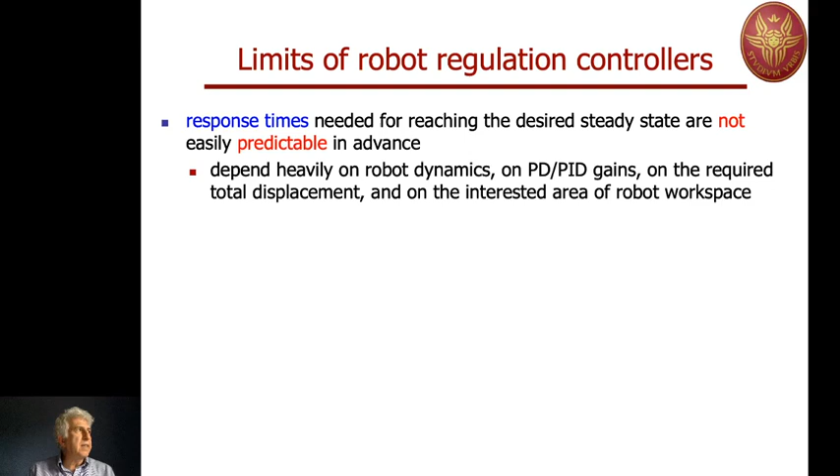This time depends indeed on the particular choice of the PD or PID gains and on the robot dynamics itself, the robot workspace. Remember that if we have sufficient conditions for our gains, the fact that we satisfy them is only a guarantee of asymptotic stability, but not of transient performance, so having a fast response time.

There's another aspect when we are dealing with the integral term, when it's present. This tends to make the final response time longer, because in the integral term we load all the errors of the transients. So even if the robot is starting from the beginning and going in the direction of the desired configuration, so everything is working fine, still we accumulate error.

So when we get closer to the configuration at the destination, maybe the integral term is overloaded with this error and needs to discharge part of the torque, because at the destination the torque needed to balance the gravity may be smaller. We know that at steady state, for sure, the integral term will compensate the gravity in the desired configuration. So if there's too much torque stored in the integral term, there will be a problem.

This is why, even in current automation practice, not for robotics, there are many anti-wind-up schemes that stop the integration when something happens. You can start integrating only in the vicinity of the destination. This could be one idea, actually quite interesting.

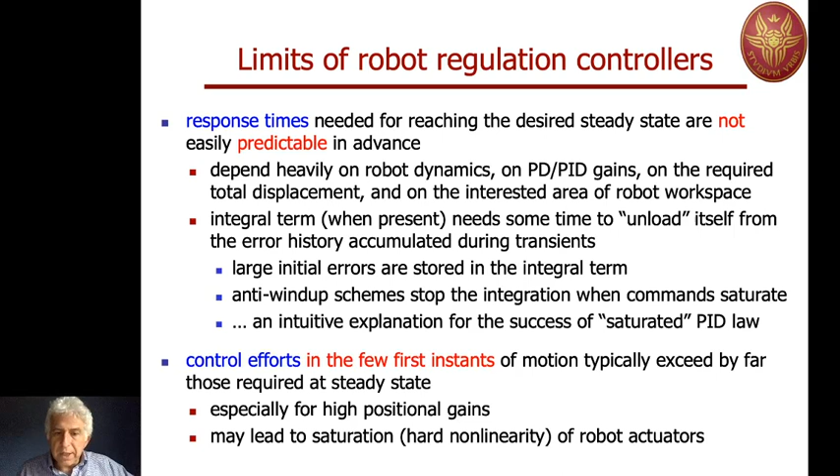So, what happens in the industrial world? Do they have all these problems? In fact, they don't have this problem. They are not interested in theoretical proof, but in practical operation. While the idea that is behind the theoretical proof for us is to really understand the nature of the control problem for robot manipulators, and suggest new ideas.

So this idea is quite simple. So in industrial robots, even if your task is only a regulation task, so you're only interested in being in some configuration and typically at rest, you don't care how you get there, provided that you go there, let's say, fast enough and without requiring too much torque. So exactly the limits of what we have seen so far.

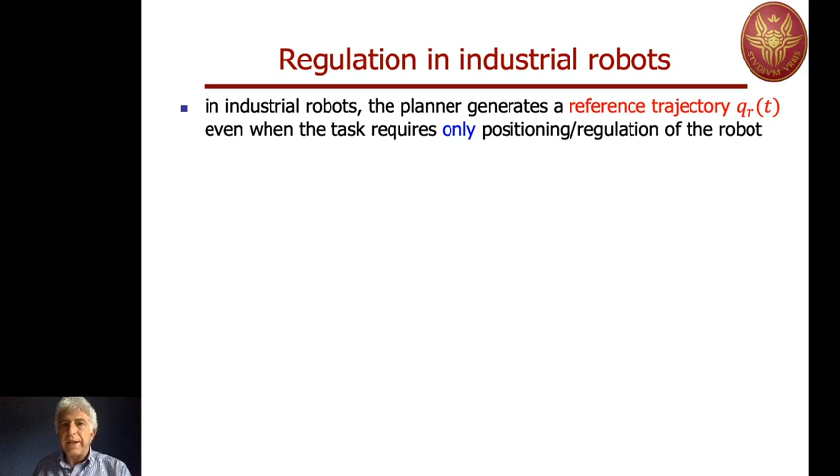So even in the case where QD is a constant reference, the trajectory planner is being called and generates a reference trajectory QR(t), which will bring the robot from the initial configuration to the desired constant configuration. Okay? So even if this trajectory has no practical information content, so we have not to follow a path with the tool in the end effector space, it's just a means to get to the final position.

Why is this useful? First of all, the reference trajectory can be chosen smooth enough. We have seen polynomial type functions, cubic or quintic polynomials, or even other things. But if we plan a trajectory between one configuration and the other, we can also define a transfer time. So how much we expect to spend in that motion. Let's call this capital T.

So this reference trajectory will have a boundary condition, certainly that at time zero, the initial start of the trajectory, the reference is equal to the current configuration. So I'm starting with zero error with respect to this trajectory. And this trajectory will get at time T to the desired configuration QD, and from there on will stay there forever. So it's just an interpolating motion that I'm fitting to the particular point-to-point task.

The form of this is practically irrelevant. Of course, I will use something that will let the robot not wander around its workspace. So I'm using polynomial type trajectories, and I'm imposing also boundary conditions for velocity and maybe also for acceleration set to 0 and so on.

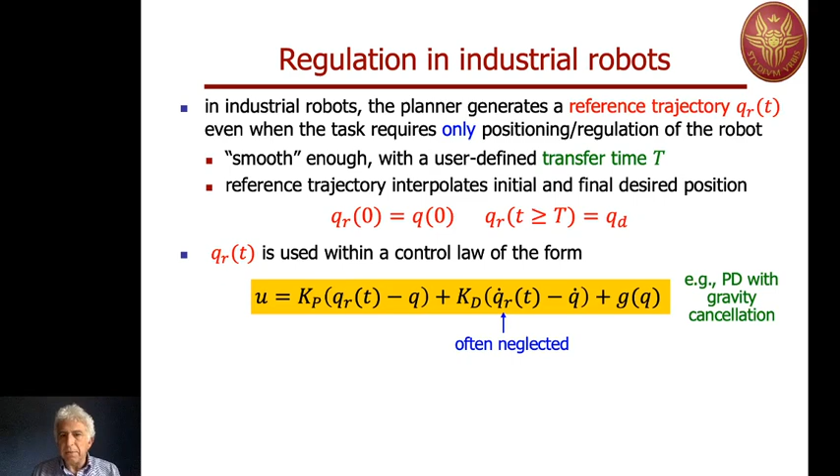So your PD plus gravity cancellation looks like the one in the yellow box, Kp times Qr of t, the reference trajectory at that instant, minus Q at that instant as well. So I'm putting a dependence on time only where I would like to show that this has changed with respect to the previous case. And then you have a Kd on the velocity error, which now is really a velocity error, although sometimes the term Qr dot is neglected in industrial practice if it's not too important.

So what are the advantages of this? First of all, forget about gravity cancellation, because this is there for sure. So just on the PD part. Initially, the velocity and the position are matched to the current position and velocity. So the initial error and its derivative are both 0. So the large effort that I would have if I would see at the initial time the full error Qd minus Q is eliminated.

Now, the second point is that indeed we have no guarantee and we cannot prove that we will follow this reference trajectory. It is likely that we will stay in the vicinity of this trajectory while moving, in particular if we choose large gains. So now we are allowed to choose a large Kp because the error is 0 and will remain small, and if it remains small I can use a larger Kp without going into saturation.

So it's a kind of a chicken and egg problem, no? So the smaller the error, the larger can be the gain. The larger the gain, the smaller remains the error. Okay.

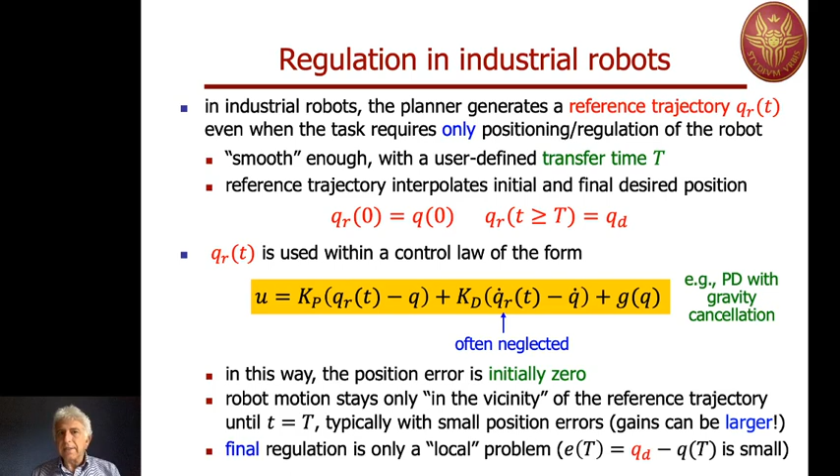Okay, so we get many practical advantages in using this type of law, this type of reference trajectory, even in a regulation task. And this is the last aspect. So let's see this from a qualitative point of view, and then we will conclude with a numerical simulation to say also some quantitative aspect. So the idea is the following. If we give to a PD controller, now with gravity or without gravity, let's suppose that gravity is there.

So the qualitative evolution of the motion will be from an initial value q of 0, and we will get there oscillating and taking a long time in order to reach the final qd. At the same time, the control commands initially will be very large and then only eventually accommodate to the final desired value, which is the one that compensates gravity at the destination.

Now, if we use a time varying position reference, interpolating in a given planned final time, capital T, the initial and the final position, for instance, the dashed red curve that goes from q0 to qd, then initially the error will be 0.

We will not necessarily follow this trajectory, but the actual trajectory of the robot, this is just one representative joint, will oscillate around, and then when the final planned time is reached, the reference becomes constant, and so we are back to the conventional regulation task, but now the initial error at time T, so for this final transient, will be small.

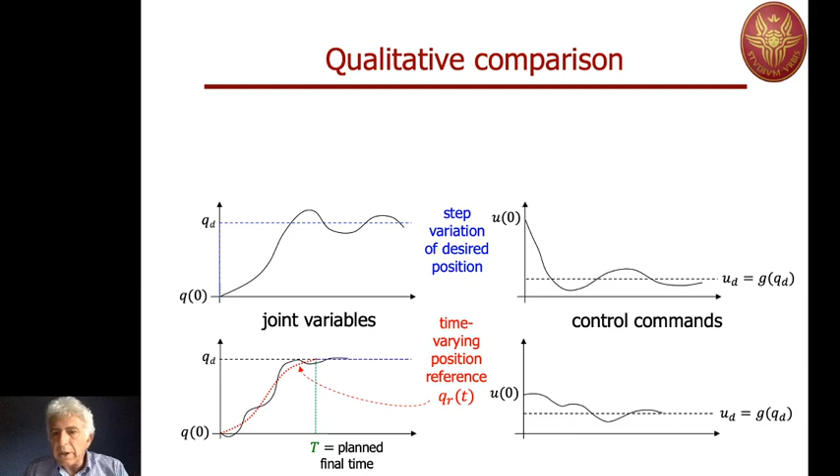At the same time, because we never get large errors, and possibly we can use large gains, you see that the qualitative evolution of the torque is the one in the last plot on the right, so the initial torque is much smaller than the previous case, and sooner we'll get probably to the final desired value when we compensate gravity.

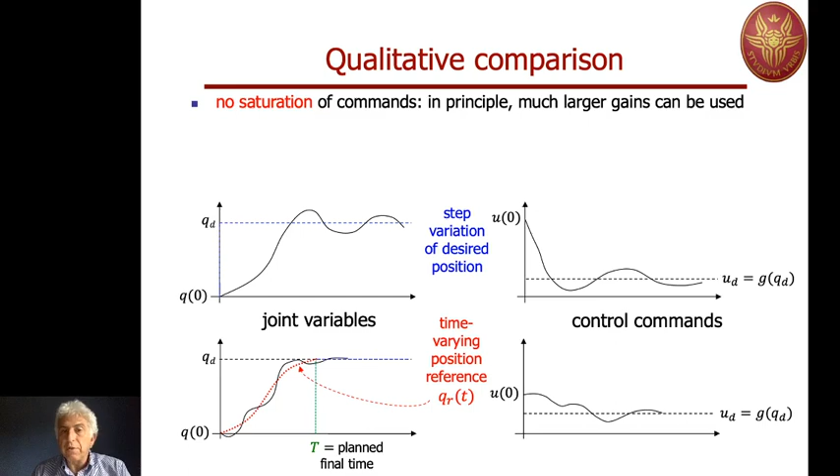So, summarizing, little chance, or no guarantee, but in general no saturation of commands, and much larger gains can be used, and also better prediction of the settling time, because we have assigned a time T, and the remaining transient from T beyond will have local exponential convergence if we design the gains using the linear approximation of the robot dynamics around the desired state, so with the configuration qd and zero velocity, exactly because we are at this point very close to that state. So both conditions are guaranteed.

Indeed, control gains still require a fine-tuning, but now this fine-tuning is easier because it's independent of the amplitude of the motion. Of course, it will depend on which part of the workspace we are connecting between q0 and the desired qd, so which type of changes in the inertial and gravity terms we are facing during this motion.

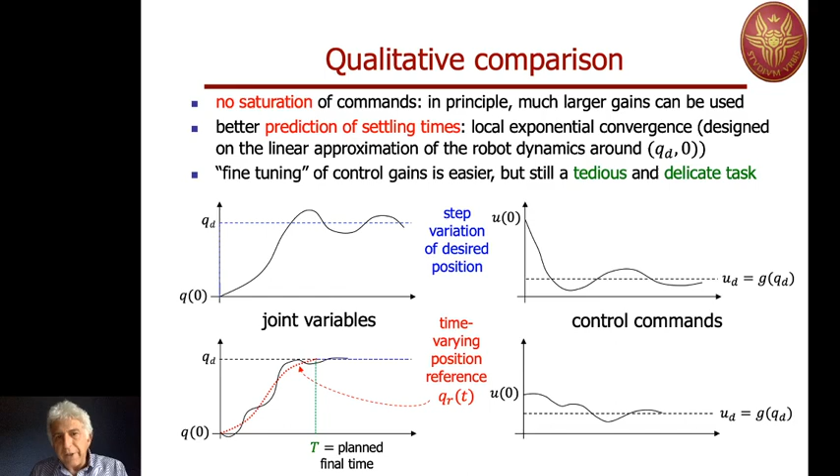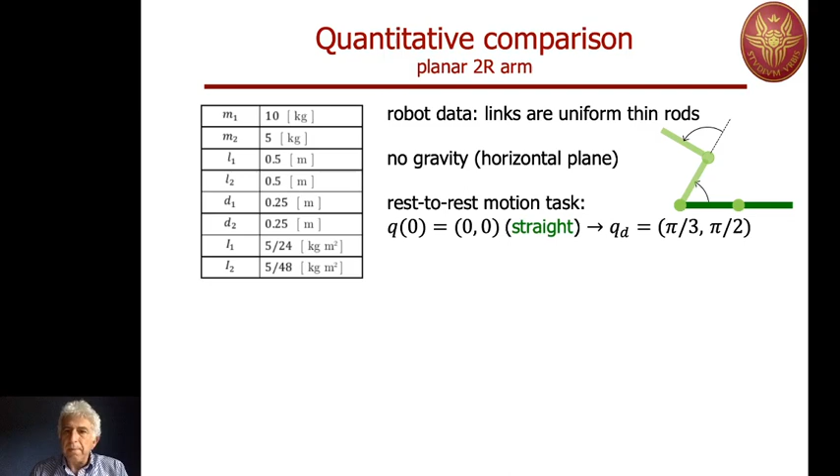So the links are uniform thin rods, no gravity, and the motion is a rest-to-rest task from the straight configuration, so 0, 0, the one in dark green, to the configuration given by pi over 3, pi over 2, which is the light green one. So this is the motion that we require, as I said, in the horizontal plane.

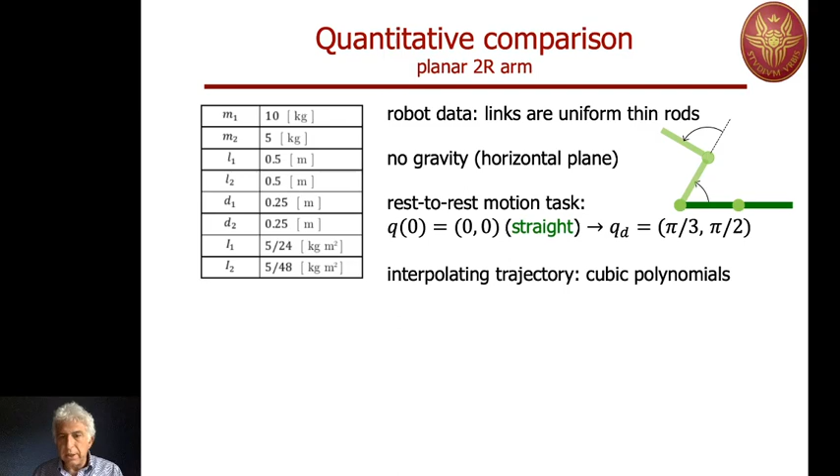And since we want to make a rest-to-rest motion, we choose as interpolating reference trajectory a cubic polynomial, so with the boundary condition equal to 0. So we have 4 boundary conditions. A cubic polynomial for each joint is sufficient. Now we consider 3 case studies.

We start with relatively low gains, so Kp 80 and 40. The first gain is larger because remember that this we use to drive the torque of the first joint, which needs to move the whole structure, so it sees masses and inertia of both links. So typically the gains of the first joints are larger than the gains of the distal joints in the serial kinematic chains.

And it's over-damped because the choices made here, this is a study made during a small project, probably were too large, so that we are damping the motion too much. And the interpolating trajectory is here built with a duration of 2 seconds. By the way, it's clear that this duration should be chosen in a suitable way.

If we choose an interpolating trajectory instead of a constant reference QD, and we choose as target motion 1 millisecond, of course this will bring no benefit because we are moving instantaneously from the initial configuration to the desired one, and this is like having a step response. So we should allow enough time, and this is also a choice that is based on the actual dynamics, so the information that we have about the robot. So here we choose 2 seconds for doing this motion.

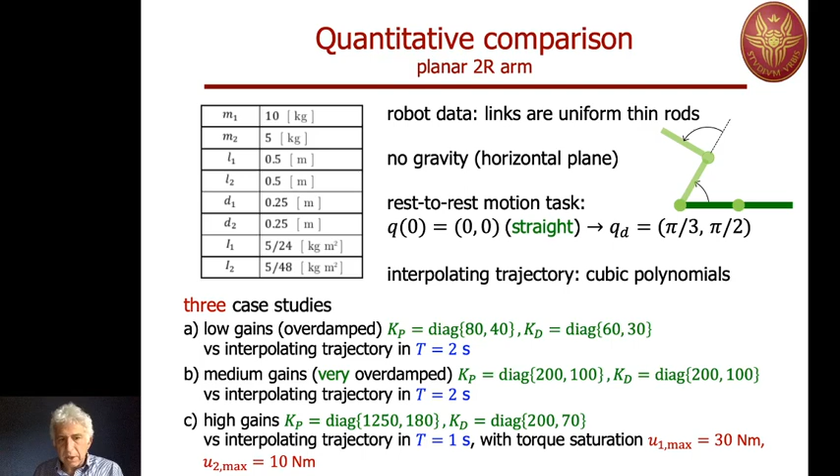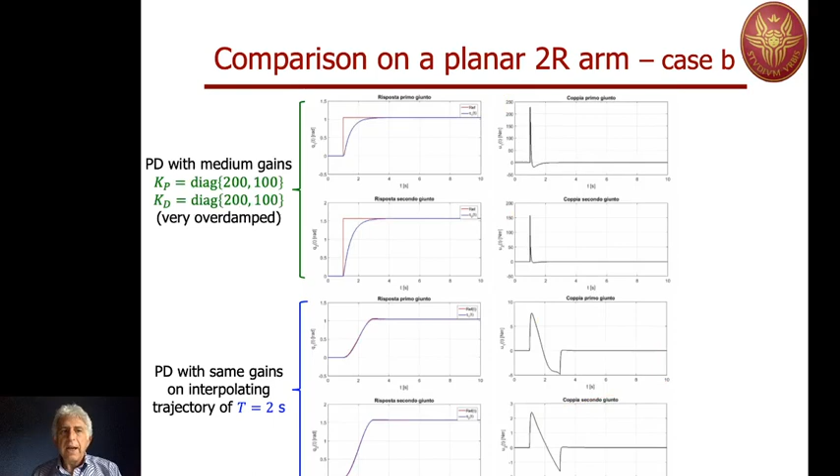In the case B, very overdamped with medium gains, so larger than the case before, same story as before, and you see that the peak reduction is even larger because we reach almost 250 and more than 150, the full scale would be 200 Newton meters for the second motor, in the case of constant QD assigned from the beginning, while we have more or less the same maximum value as before for the case in which we use an interpolating reference trajectory.

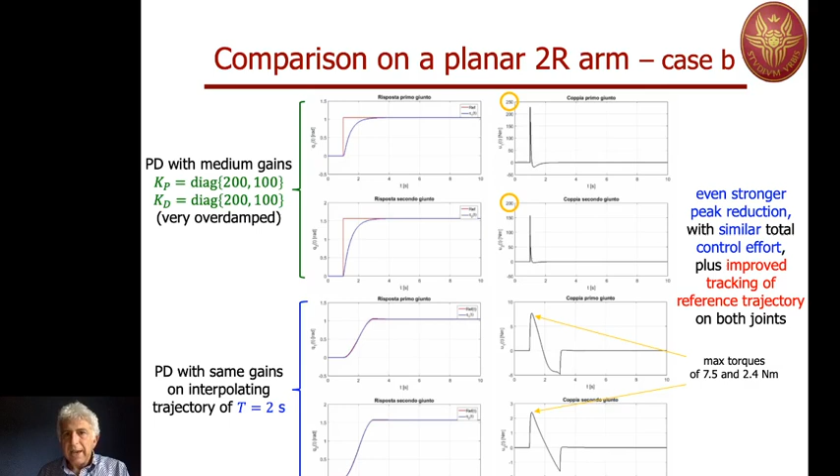With larger gains anyway, larger than before, so this medium value, we can see that the following of the trajectory is quite similar. Now pay attention, we are not imposing any restriction in this case to the maximum torque. And finally, the last case, and by this I would like to conclude this long lecture today, we can see that with PD gains very large, so very large proportional gain in particular, you can see some overshooting in the first joint. This is because we have reduced a bit the derivative terms, so the system is no longer overdamped.

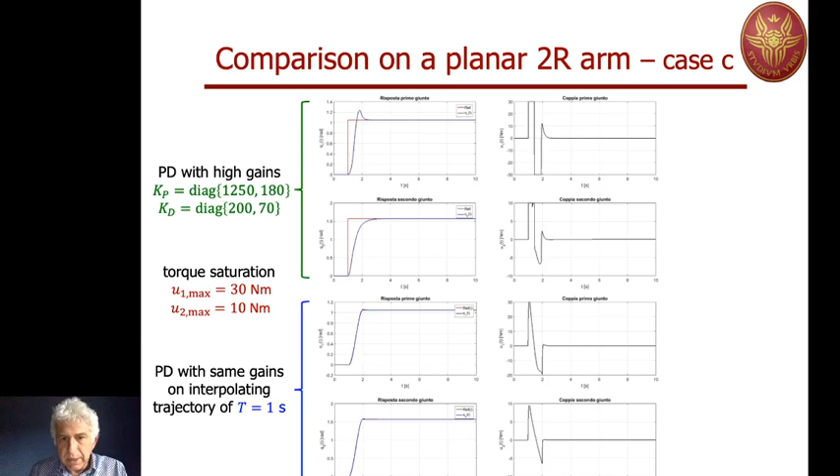But you can see that there is saturation for a few tenths of seconds in joint 1 and also in joint 2. Whereas in the other case, although we have chosen a faster interpolating trajectory with just 1 second of transient, because of the larger gains, we follow it pretty much closely, and even the peak torques are below the maximum level. So we have no peak torques in the first case just because we have saturation.

But in the second case, we have just 1 instant of saturation of the first joint and no saturation of the second one. And we have the best of all worlds, so we are keeping the system below saturation, and in any case with low maximum torque. The transient is fast enough, even faster than the previous case, no overshooting. We don't care about any error along the trajectory. I'm not showing this because the only thing we were caring about here was the final destination, because this remains a regulation task. And with this, we conclude today's lecture,